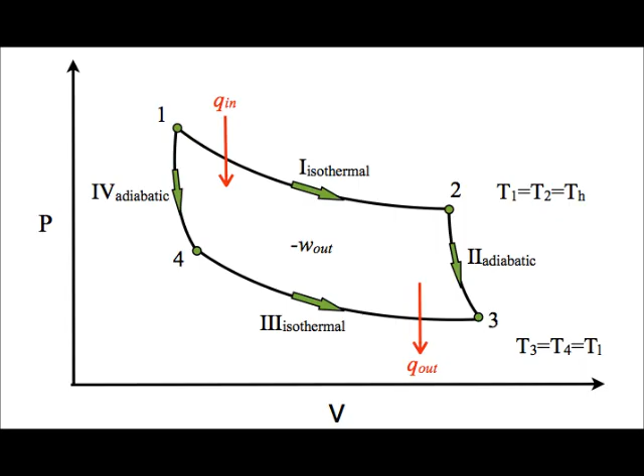Now the Carnot cycle begins in process A, or process 1, where the gas expands isothermally, without change of temperature, while in contact with a reservoir with a specific initial temperature.

Then in the process B to C, the gas expands adiabatically, as we mentioned, with no exchange of heat. Then in process C to D, the gas is compressed isothermically again, while in contact with a reservoir that has a smaller temperature than it had in the beginning.

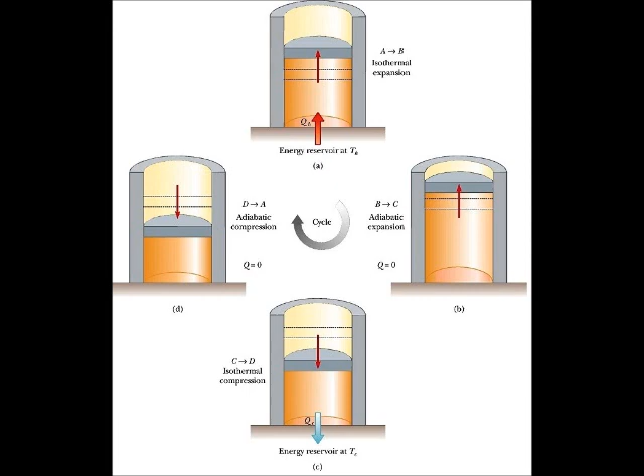Now in process D to A, which goes back to the beginning, the gas is compressed adiabatically, and the upward arrows on the piston indicate that the weights are being removed during the expansions, while the downward arrows indicate that the weights are being added during the compressions.

Now let's talk about the Stirling cycle, known as well as the ideal Stirling cycle. The main idea of this cycle is that a fixed amount of gas is sealed inside an engine, and this involves a series of events that change the pressure of the gas inside the engine, causing it to do work.

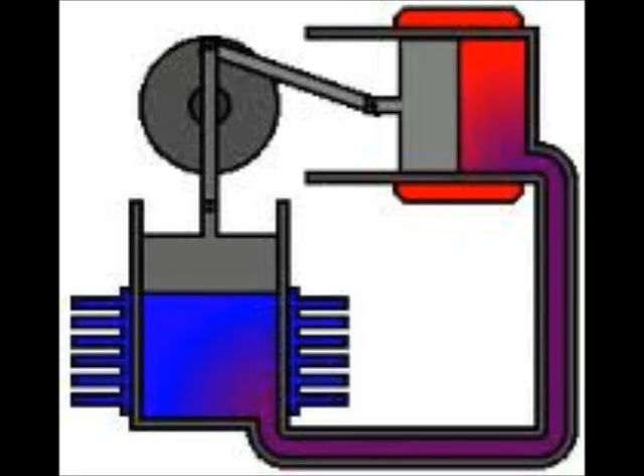On step 1, heat is added to the gas inside the heated cylinder on the left, and the pressure starts to build. This forces the piston to move down, and this is where work is done.

The left piston moves up while the right piston moves down, pushing the hot gas into the cool cylinder, which quickly cools the gas to the temperature of the cooling source, making it easier to compress the gas in the next part of the cycle.

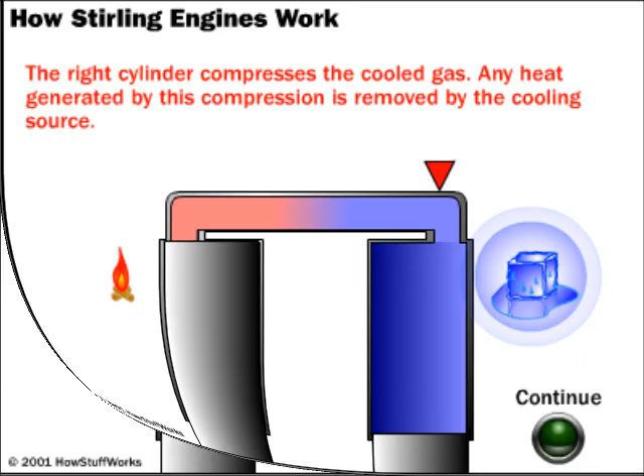This is part 3, where the piston in the cool cylinder on the right side starts to compress the gas. Heat is generally generated, but this compression heat is removed by the cooling source.

On step 4, the right piston moves up while the left piston moves down, forcing the gas into the heated cylinder where it quickly heats up, and then everything begins again at step 1.

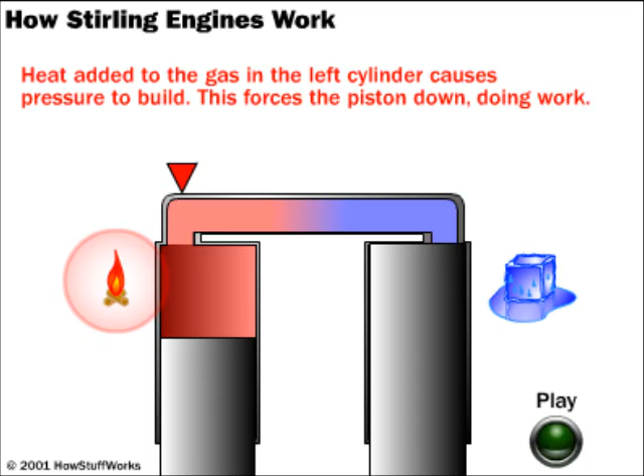Next cycle is the Otto cycle, an idealized thermodynamic cycle that describes a typical spark ignition piston engine found in every automobile engine nowadays.

The first step is the intake stroke, where the gasoline-air mixture goes into the piston through an intake valve, and this piston is sealed and isolated theoretically.

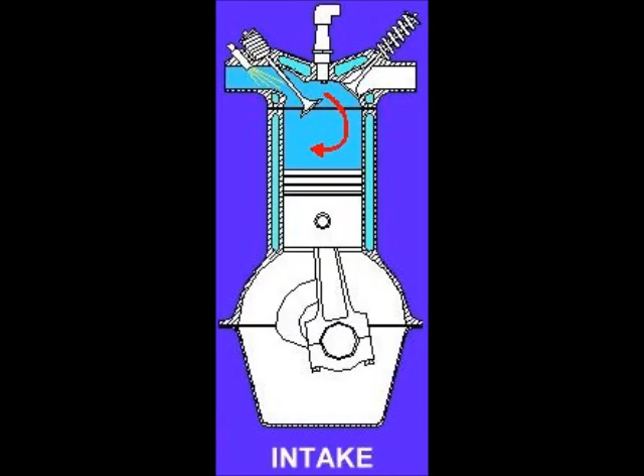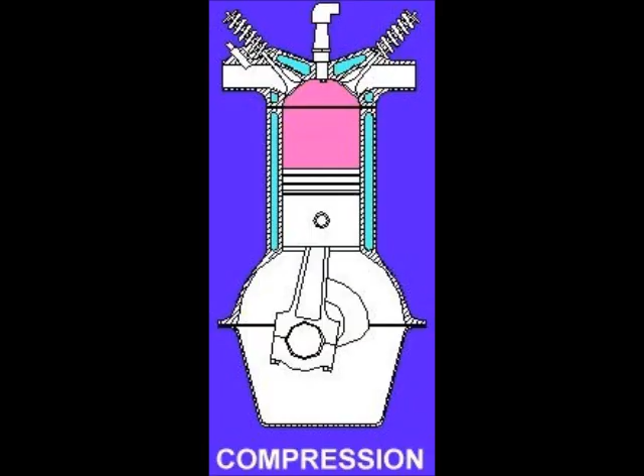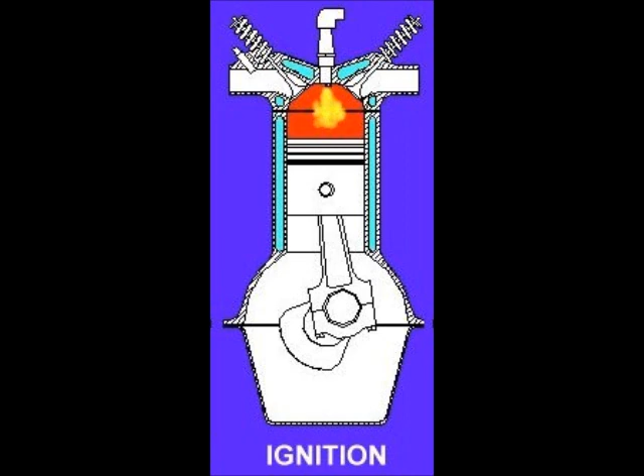The third step is the ignition stroke, where the increased high pressure exerts a greater amount of force, and the ignition is done by a part of the piston called the spark plug, which ignites the air-fuel mixture, so combustion occurs and the piston is violently pushed down.

The last step is the exhaust stroke, where the remaining smoke from the ignition is ejected through the exhaust valve, and the cycle begins again.

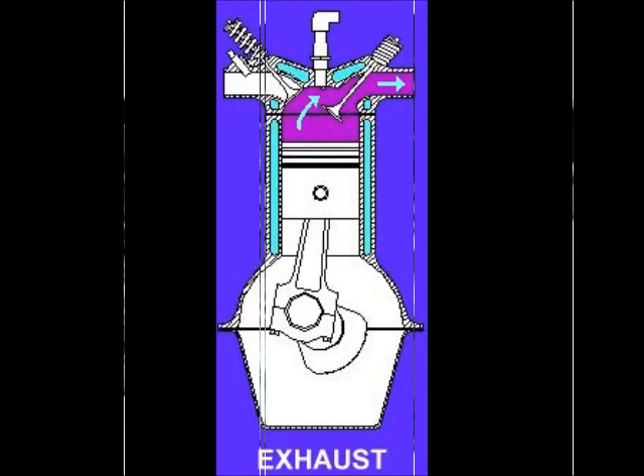The next thermodynamical cycle is the diesel cycle, which is very similar to the Otto cycle. It also has four steps.

The intake stroke, in this case, instead of gasoline, it's diesel with an air mixture that goes in. Then the compression stroke, where this mixture is compressed at the top of the piston.

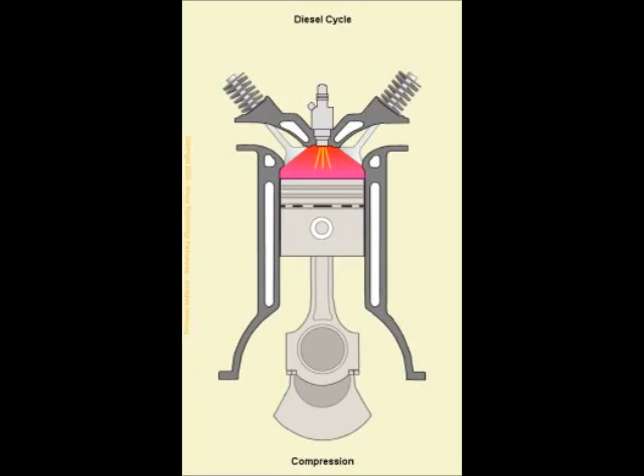The only change from the Otto cycle is step 3, where there is no spark plug. There is no spark needed, because compression ignition takes place when the fuel from the high-pressure fuel injectors spontaneously ignites alone inside the cylinder without any spark. This is in contrast to the automatic spark ignition we saw in the Otto cycle.

And there is step 4, the exhaust stroke. Again, the smoke from the ignition is ejected through the exhaust valve.

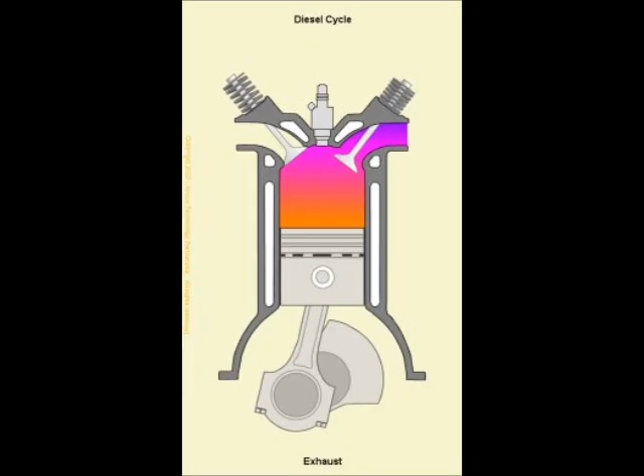Now, last but not least, is the dual cycle, a thermal cycle that is a combination of the last two we have seen, the Otto cycle and the diesel cycle.

This has 5 steps, beginning with the first, the adiabatic compression, where the gas is compressed inside the piston. The second step is the addition of heat at constant volume.